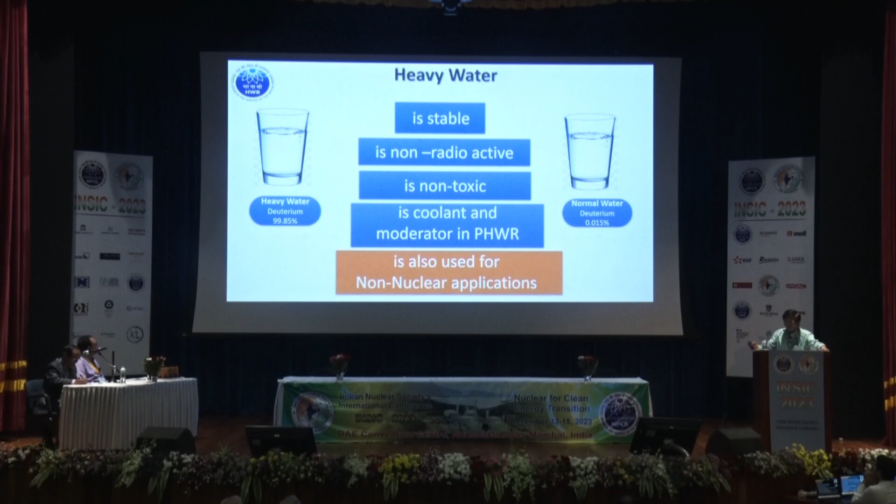For the people who are not aware of what heavy water is, this slide shows that heavy water is stable, it is non-radioactive, non-toxic. It is used as coolant and moderator in PHWRs, and nowadays heavy water is also used in many non-nuclear applications. We will discuss non-nuclear applications of heavy water in detail in the later part of the presentation.

There are three stages, as you all know, of the nuclear power program in India. Input from Heavy Water Board is heavy water, solvents, enriched boron, enriched boron carbide pellets, and also nuclear grade sodium.

In a similar way, Heavy Water Board has also got three phases, as Verma Sahib has told. Initial stage is that heavy water should be produced at any cost, next phase is heavy water at least cost, and third phase is we also produce heavy water. As Mahapatra Sahib has told, we are into many activities which I will discuss in detail later.

And in India, we have mastered 4 technologies for production of heavy water. First one is electrolysis, followed by cryogenic distillation of hydrogen. Second one is ammonia hydrogen monothermal process. Third one is ammonia hydrogen bithermal process, and H2S-H2O bithermal process. And later we have mastered ammonia water technology also.

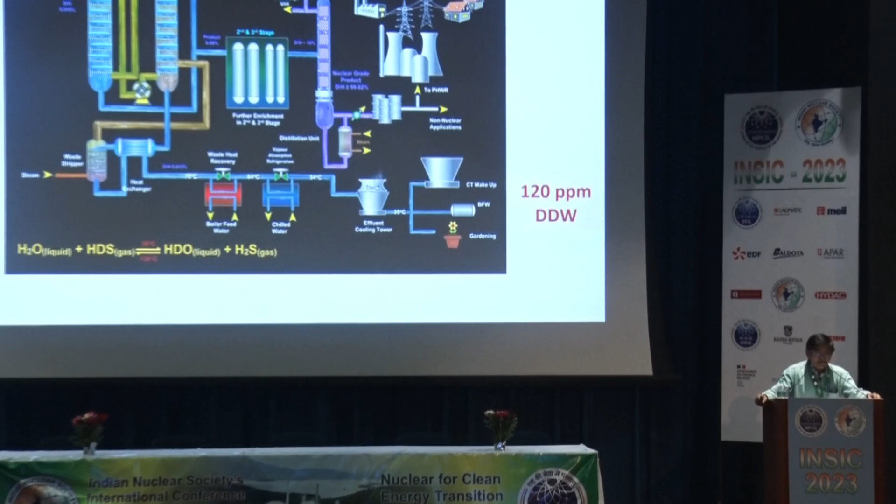Second technology, as I have told, is H2S-H2O based technology. Raw material for this process is water. Normal water contains around 152 ppm of deuterium, and this process is a 3-stage cascade. We enrich deuterium from 152 ppm in water to around 15% in the exchange unit where, as Verma Sahib has told, we handle highly toxic hydrogen sulfide gas. Toxicity is such that at 800 ppm, it is instantaneous death.

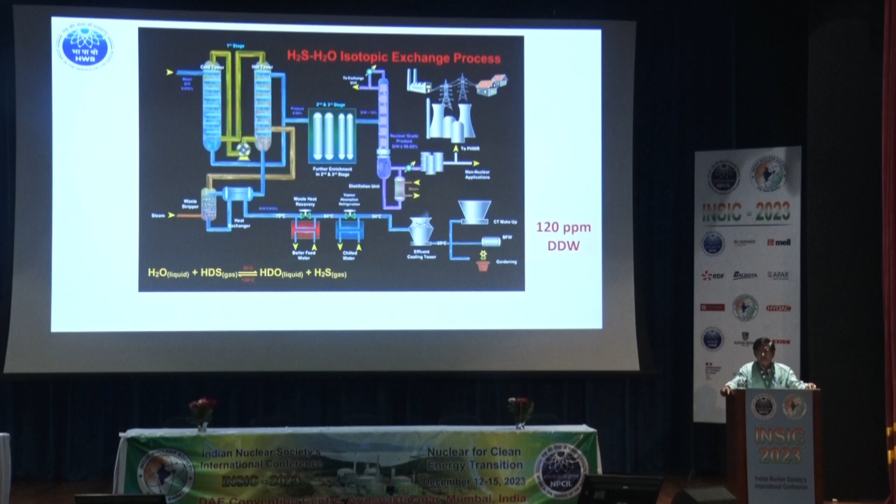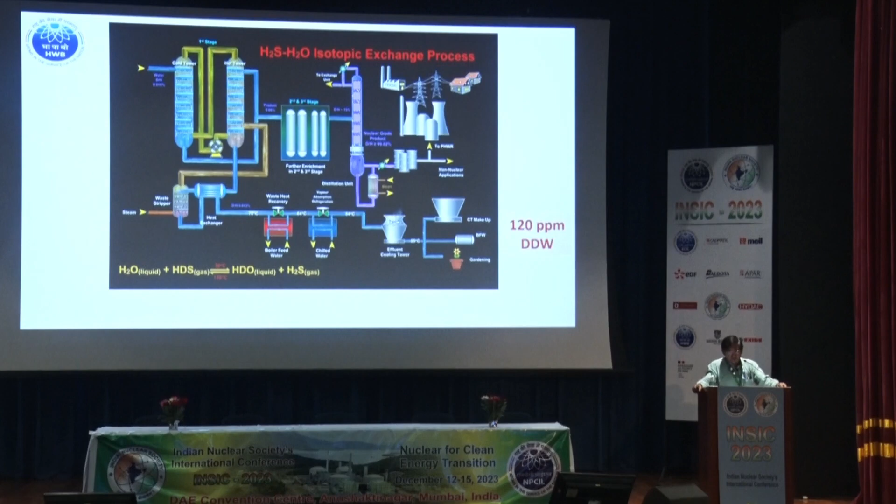Because it was the first time we were handling H2S in India for production of heavy water, we started from scratch. It was very difficult, and many studies were carried out in BARC for development of this technology. And also, moist H2S is highly corrosive. So material selection was very difficult, and it is highly corrosive to carbon steel. The protective film formation process was developed in BARC, and we carried it out, and protective films were formed.

And as we are handling toxic H2S gas, many inbuilt safety features are there to take care of any eventualities. We have got around a 126 meter height flare stack to take care of intentional and unintentional releases of H2S gas. Designing a 126 meter height flare stack in those days, in the 1980s, when computers were not there, and doing risk analysis, you can imagine it was a very difficult task, and it was done. And this plant was commissioned.

First plant was commissioned at Kota, and subsequently, with the experience gained from Kota, many modifications have been carried out, and second plant was set up based on this technology at Manuguru. At Manuguru, we have got 2 streams of H2S-H2O based plant, and at Kota, we have got 1 stream.

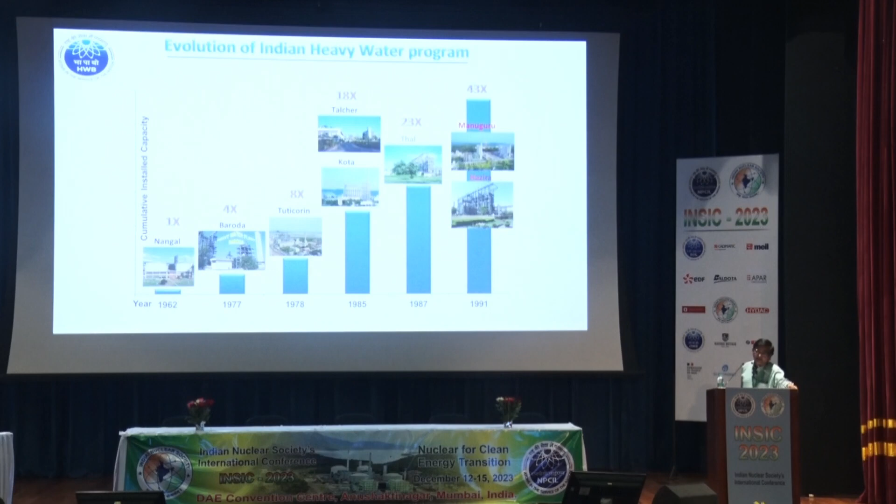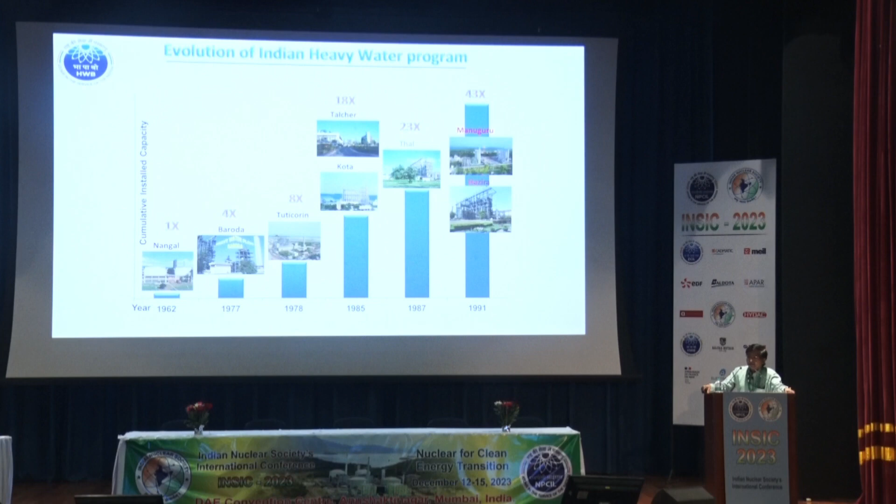Then in 1985 we had two plants commissioned, one at Kota based on H2S-H2O technology, and at Talcher a bithermal ammonia-hydrogen exchange process. It is integrated with the FCI, Fertilizer Corporation of India, fertilizer plant. In 1987 we commissioned the Thal heavy water plant, where we take raw material syngas from RCF, whereas in 1991 the Hazira plant was commissioned, integrated with KRIBHCO, and Manuguru, based on H2S-H2O technology.

And later, in 1994, the Baroda heavy water plant was decommissioned because the fertilizer plant modified their technology and brought down the pressure required for heavy water plant operation. After the technology modifications, the pressure came down, and we could not operate the Baroda plant.

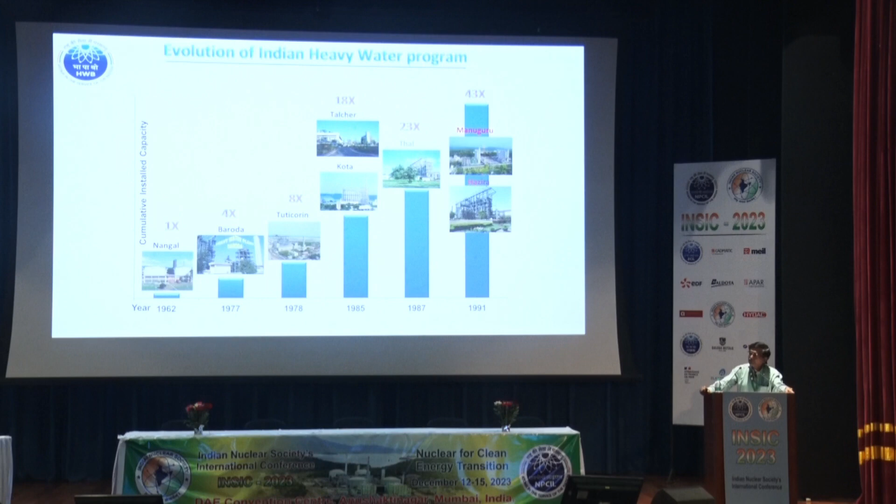It was decommissioned, and Tuticorin went for shutdown in 2007 because SPIC was shut down due to non-availability of naphtha. But they restarted their SPIC plant in 2015, and we are in the process of refurbishing our heavy water plant. We will be starting the heavy water plant at Tuticorin next year, in June. We will be commissioning the plant again.

In Gujarat, we have got Baroda heavy water plant. And in addition to heavy water, when the plant was decommissioned, we have gone for diversified activities at Baroda. We have got a TBP plant, tributyl phosphate solvent we produce, and also we are into production of nuclear grade sodium. And we have got one more plant in Gujarat, that is heavy water plant Hazira.

And the central office we have got in Mumbai. And we have got one more technology demonstration plant in RCF Chembur, where we carry out many developmental activities, and we have got one more plant at Thal, heavy water plant Thal. And in Kota, Rajasthan, we have got a heavy water plant, and in Talcher, we have got a heavy water plant.

It was decommissioned because of the shutdown of FCI, and we have gone to diversified activities at Talcher. We have got a boron enrichment plant, we have got TBP, and also we have got VSPP, where we produce various solvents. At Manuguru, in addition to the heavy water plant, we have got a boron enrichment plant. Again, this is based on ion exchange chromatography technology, and we have got an elemental boron plant also.

This deuterium, as I have told you, applications have increased tremendously over the last few years. In addition to nuclear reactors, it is used in life sciences, it is used in analytical sciences as deuterated NMR solvents, and it is being used in electronic components like OLED TVs, TV screens, and also in information technology for OFC cables. And many more applications are there nowadays.

Recently, there is a demand for heavy water for production of eye drops. It is used for rectification of child myopia. Heavy water is being used for the eye drops. Now we will discuss non-nuclear applications of heavy water.

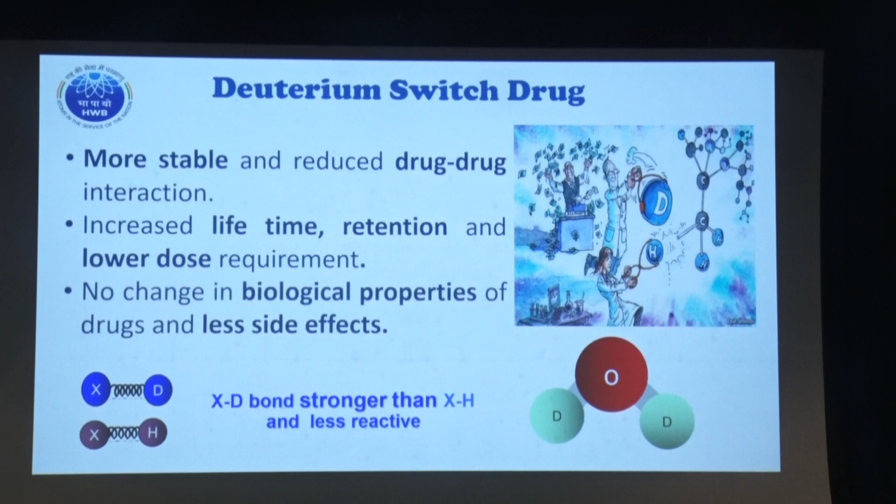Heavy water is used for the manufacture of drugs also, and the first drug was approved by FDA in 2017. What is the advantage of using heavy water for production of drugs? It is more stable and reduces drug-drug interaction. If you replace a hydrogen atom with deuterium, compare the CH bond and CD bond: the CD bond strength is high as compared to the CH bond.

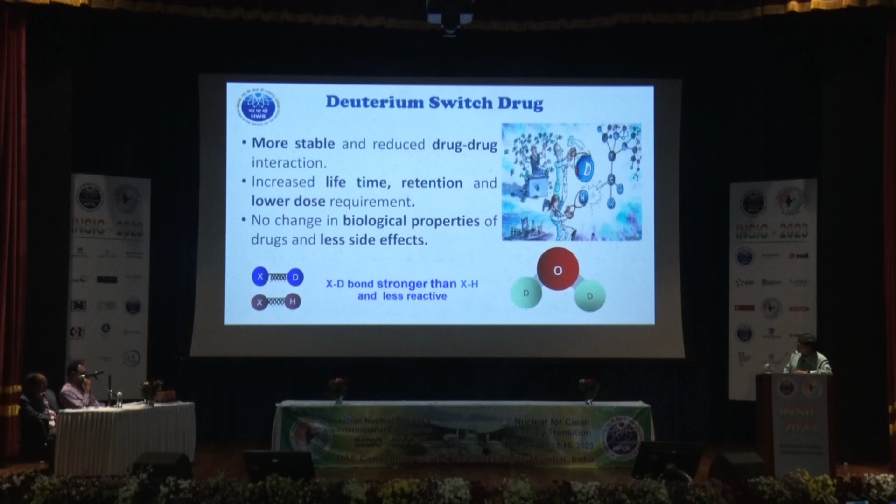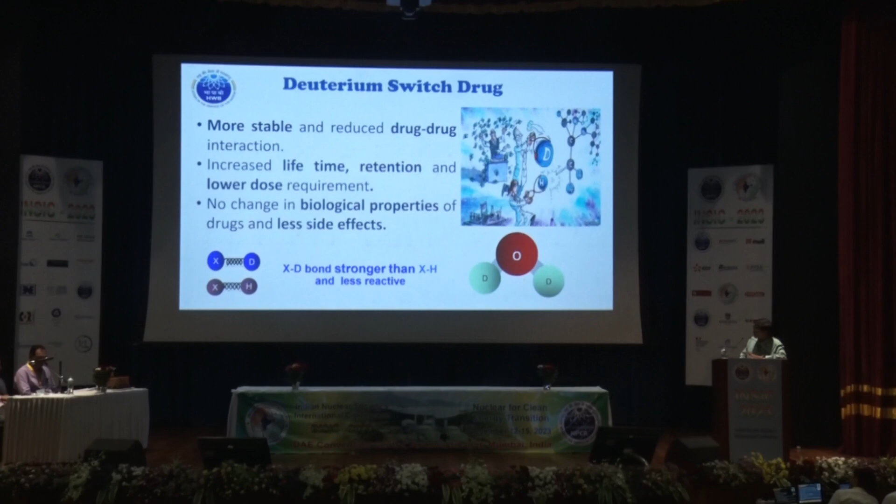So it takes more energy for disintegration of this bond. So the lifetime of the drug increases tremendously, and lower dose is required if you use heavy water for the manufacture of drugs, and there is no change in biological properties of drugs, and it has got less side effects. Toxicology with respect to drug, if you use heavy water, the toxic effects come down.

So far, as I have told you, 2 deuterated drugs have been approved by FDA, and deuterated drugs are in pipeline. 3 drugs are under third phase clinical trials. 4 drugs are under preclinical trials. Actually, yesterday I was going through Science Journal, October 2023. It was reported that 16 deuterated drugs are in the pipeline.

Life sciences usage of heavy water. In life sciences, it improves the thermal stabilization of biomaterial. It is used for polio vaccine also. Heavy water is used for increasing thermal stabilization, and for short-term safe storage of biomaterial, and therapeutic applications also. Heavy water in collaboration with EVRC demonstrated thermostabilization of oral polio vaccine in D2O, obviating the cold chain.

Heavy water is also used as solvent in a number of applications, nuclear magnetic resonance applications. These are the solvents normally used for NMR spectroscopy, that is deuterochloroform, DMSO-d6, acetone-d6, acetonitrile-d3, and benzene-d6.

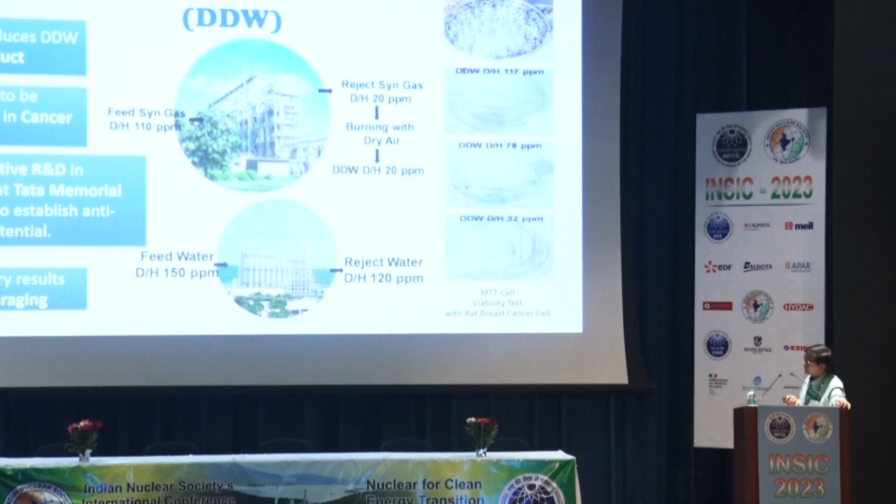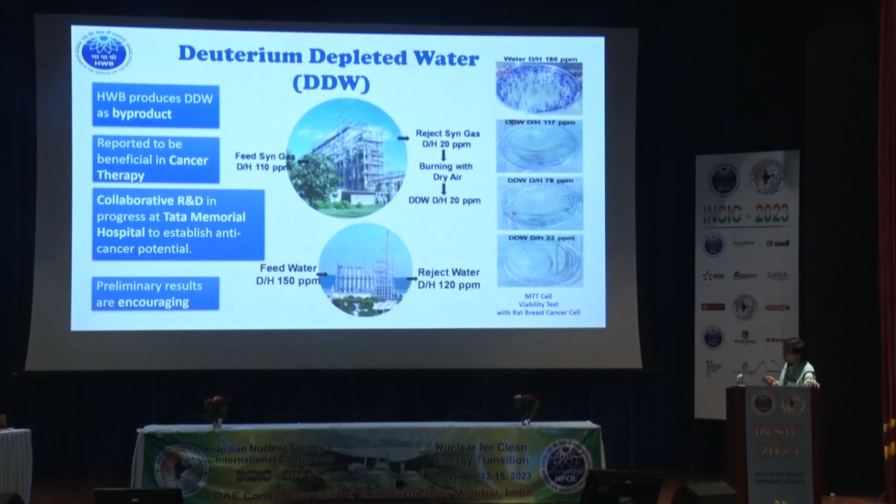It is reported to be beneficial in cancer therapy, and we are having collaborative R&D with the Tata Memorial Hospital to establish its anti-cancer potential. Actually, many research papers are there which show that it is useful as an anti-cancer agent. And preliminary results are encouraging, very encouraging.

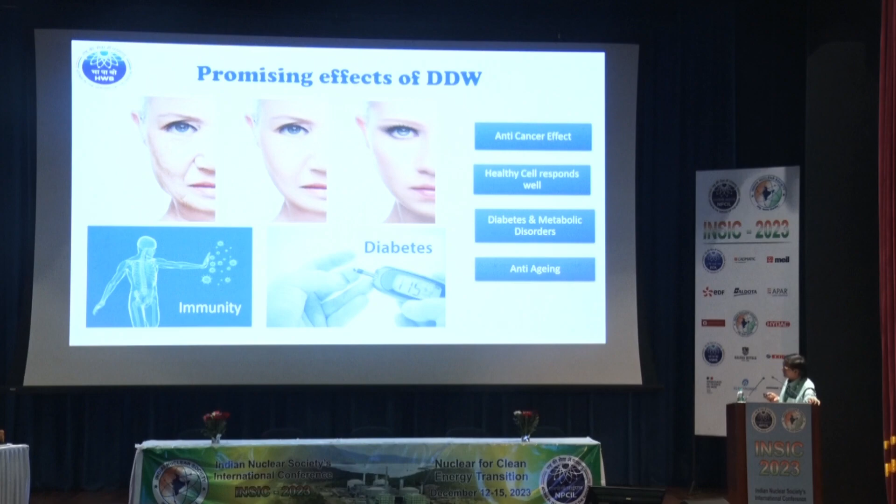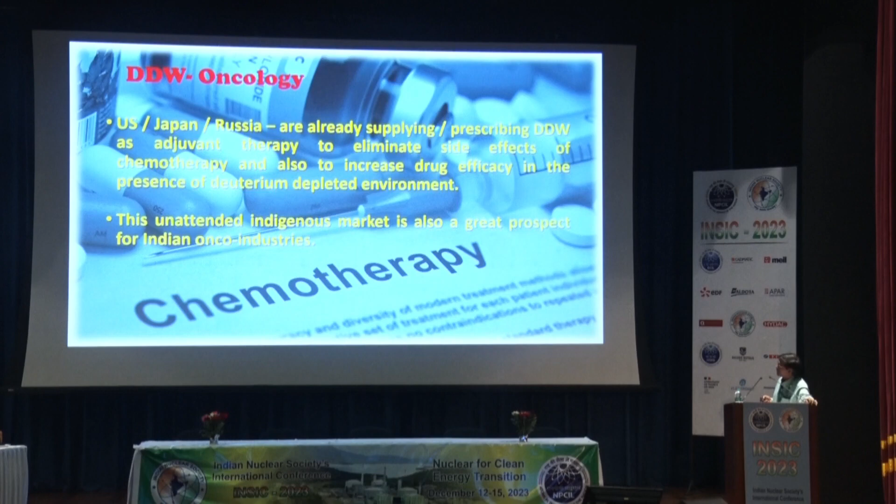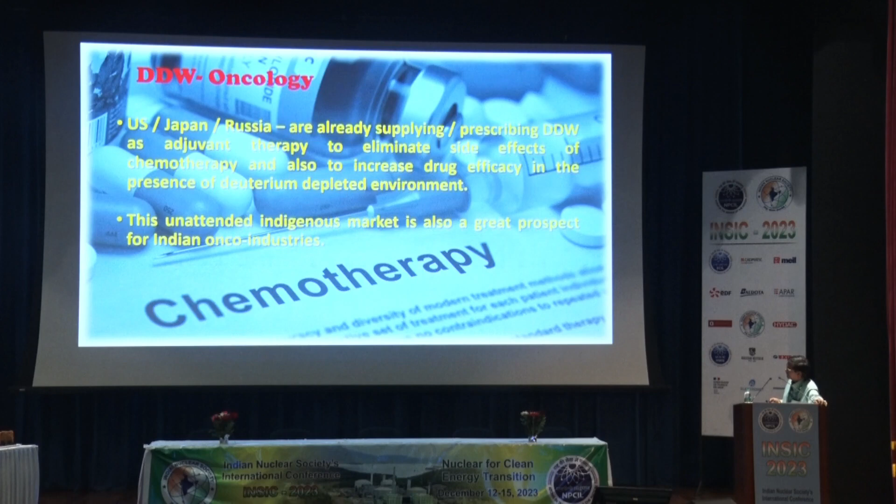This is also used for diabetic metabolic disorders, and it is also used as an anti-aging agent as per the research available in the literature. And USA, Japan, Russia are already prescribing DDW as adjuvant therapy to eliminate side effects of chemotherapy, and also to increase drug efficacy in the presence of a deuterium depleted environment. These are already available in the market, and recently we have given it to 3 firms in India. They have also launched their products.

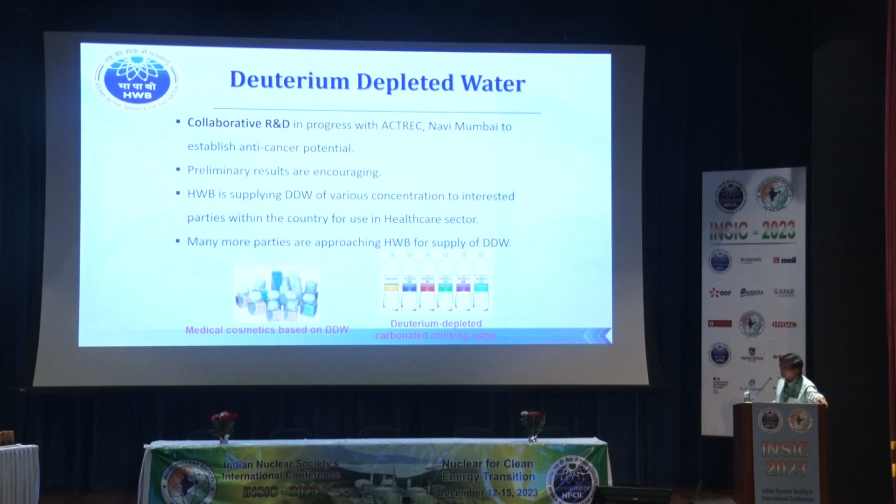Next, Heavy Water Board has taken up activities on O18 water, H2O18 water, a healthcare initiative by Heavy Water Board. This is 95% H2O18 for PET scans for cancer detection, and 10% D2O18 for metabolic studies. Heavy Water Board has set up a pilot scale facility at Manuguru, and product quality is better than imported H2O18 water, and an industry scale facility we are planning to set up at Manuguru.

Actually, we have carried out initial experiments at Tuticorin using a small column. Based on those bench scale studies, we have set up a pilot scale facility at Manuguru, and we have withdrawn the product H2O18 of greater than 97%, and it was tested on patients, and the PET scanning images are perfect. And we have got the sample analyzed in USA, and it is better than what is being imported by India.

Actually, the cost of 1 liter of H2O18 water is around 18 to 19 lakhs, and we will be substituting the import with our product, and we are in talks with RMC as well as BRIT for supplying this H2O18 water.

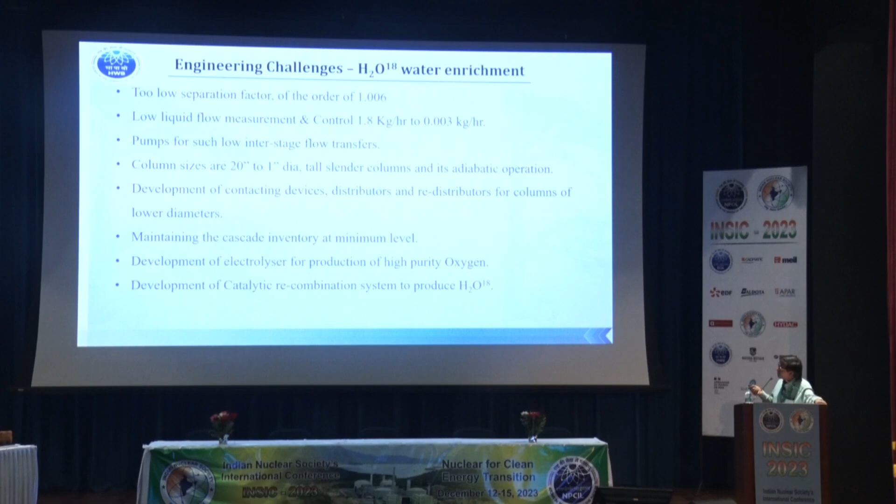And pumps for such low interstage flow transfers, and column sizes vary from 20 inch to 1 inch. It is actually an 11 stage cascade that we have at Manuguru for enriching. When you enrich deuterium from 152 ppm to nuclear grade, O18, whose natural abundance is 0.2%, also gets enriched up to 0.4% along with deuterium. That 0.4% becomes the feed for this O18 production facility, and we are enriching from 0.4% to more than 97% in these columns, 11 stage cascade.

And the main challenge is reduction of inventories by doing process intensification. It is a very big challenge because inventory should be as low as possible, as we all know. And development of an electrolyzer for production of high purity oxygen. What we produce is D2O18, called double labeled water, DLW. We split D2O18 into D2 and O18, and we split normal water into H2 and O16, then we combine H2 and O18 in a recombination unit to produce H2O18.

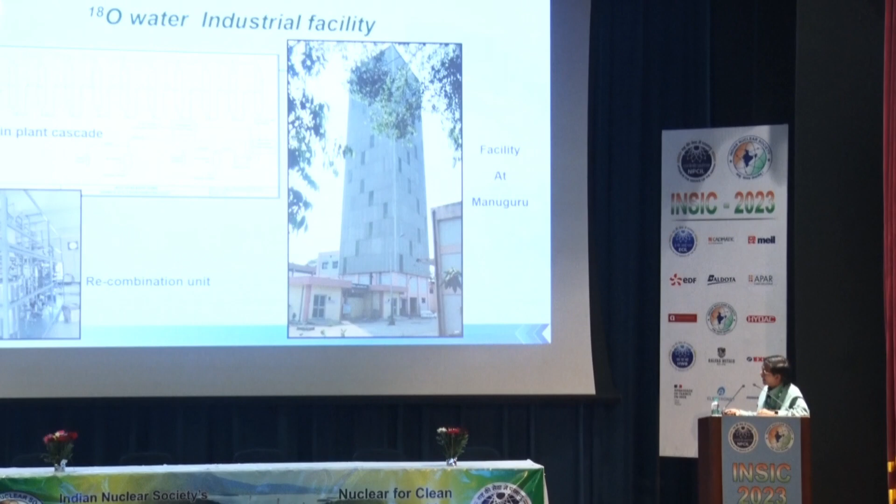These are the special equipment employed for enrichment of O18 water. We have a low flow gas recirculator, DX packing, and low flow diaphragm pumps. These are the facilities available at Manuguru. This is the flow sheet, 11 stage cascade, and these 11 stage cascade columns are enclosed in this, and then we have the recombination unit for recombining H2 and O18.

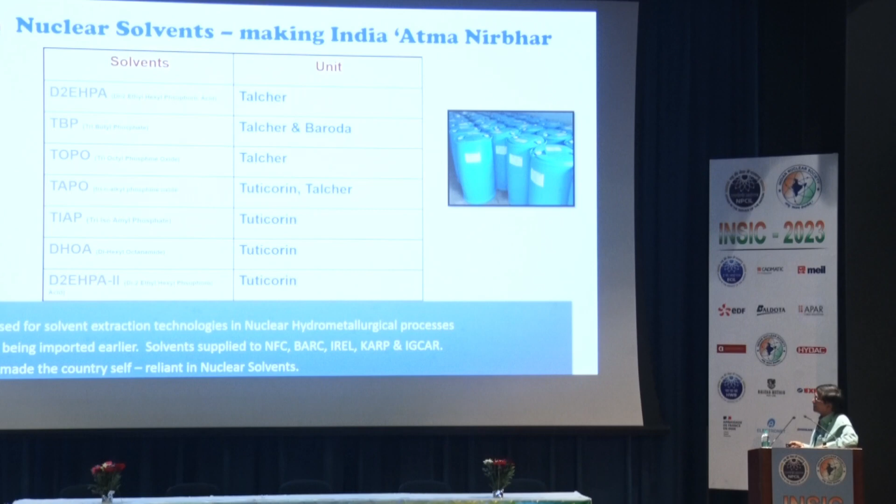Next, what we are into is nuclear solvents. We produce all these solvents: D2EHPA at Talcher, TBP, tributyl phosphate, at Talcher and Baroda, TOPO, TAPO, TIAP, DHOA, and D2EHPA-II at Tuticorin. These solvents are used in nuclear hydrometallurgical processes and were being imported earlier. Then Heavy Water Board took the challenge and produced these solvents, and we are meeting the demands of the Indian Nuclear Power Program. We are supplying these solvents to NFC, BARC, IREL, KARP and IGCAR, and Heavy Water Board made the country self-reliant with respect to nuclear solvents.

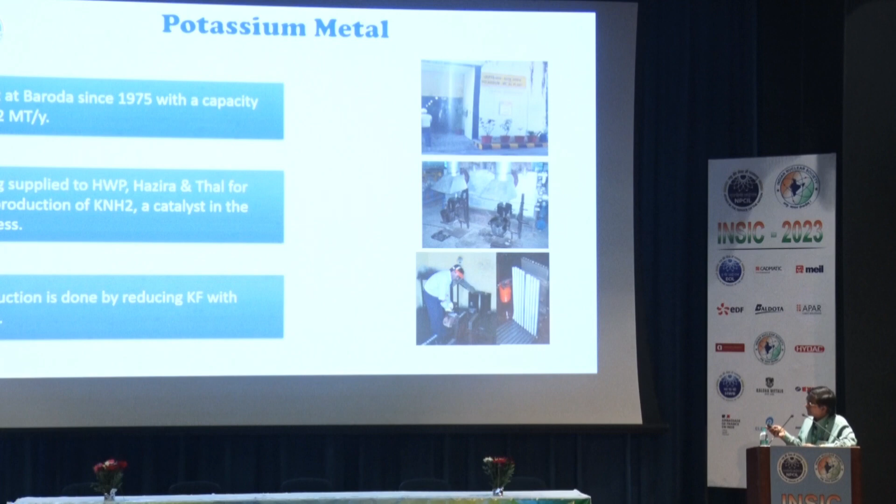We also produce potassium metal at Baroda. We have a plant with a capacity of 22 metric tons per annum, and this potassium metal is used as catalyst in the ammonia hydrogen based process. For production of potassium amide catalyst, we use potassium produced at Baroda. In-house consumption is being met through this plant.

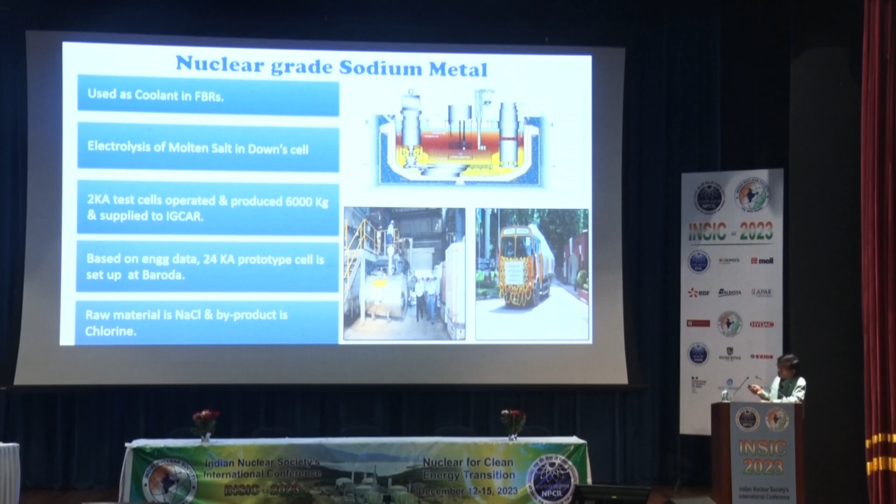We also produce nuclear grade sodium metal. It is used as coolant in FBRs. Electrolysis of molten salt in Downs cells: we are using the Downs cell for production of sodium. We have carried out experiments on a 2 kiloamp cell and produced around 6 tons of nuclear grade sodium, which we supplied to IGCAR. Now we are scaling up to a 24 kiloamp cell. That cell has been operated and there were some problems. We are modifying the cell and will be starting shortly. Within 3-4 months, we will be testing that 24 kiloamp prototype cell.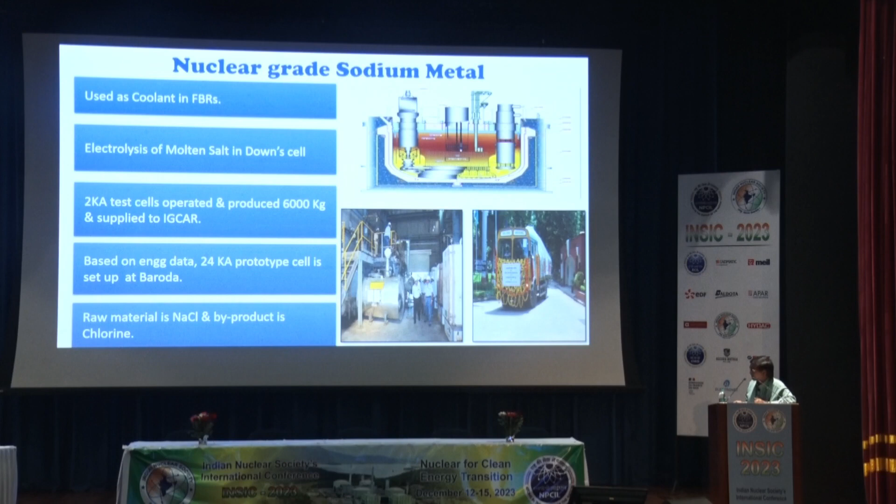Next is the new development activities being taken up. This is the last topic I will be discussing: the development activities Heavy Water Board is doing.

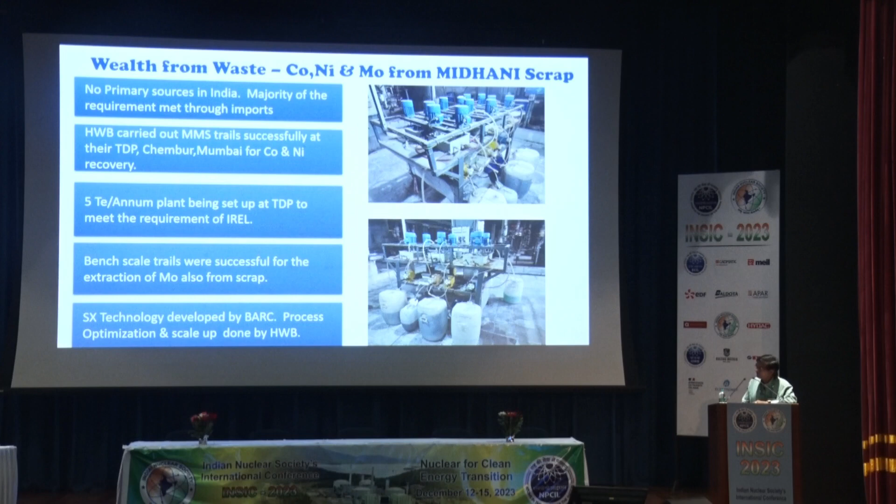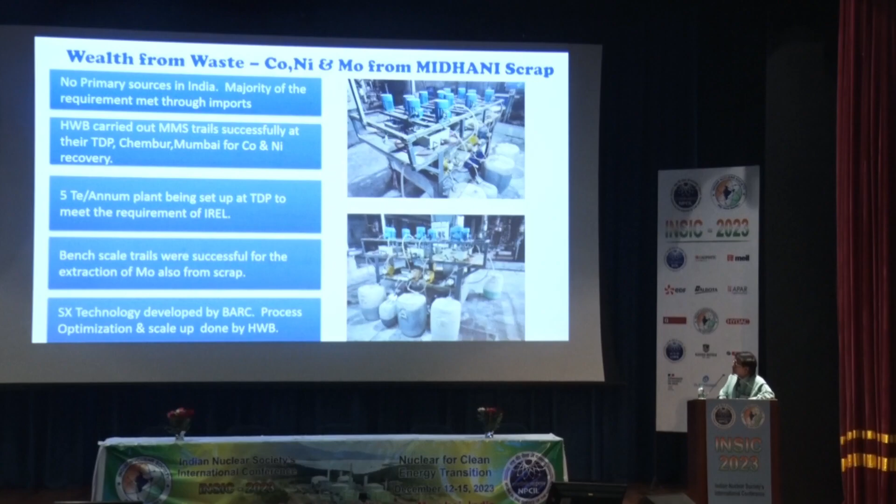Midhani, while preparing strategic components, generates scrap, maraging steel scrap, MDN 350, 250. This scrap contains cobalt, nickel, and molybdenum. For recovery of these valuable metals, technology has been developed by BARC, and we have tested it on bench scale at the technology demonstration plant Chembur, and we are planning to set up a 5 ton per annum plant at TDP to meet the requirement of IREL. IREL has already set up a samarium cobalt permanent magnet plant at Vizag, and requires around 2 tons per annum of cobalt. Cobalt is being imported now, so we will meet that requirement by setting up this plant at TDP.